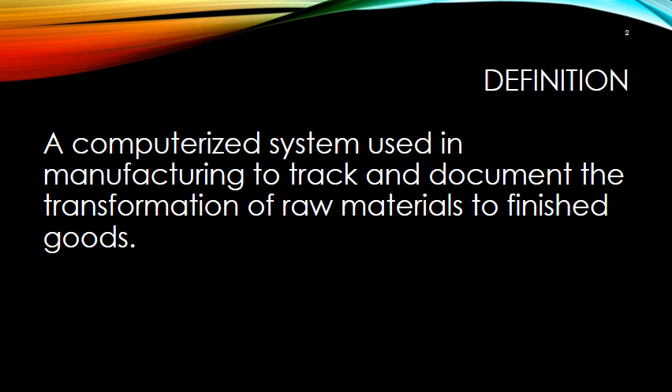I want to start with a simple definition. This one comes from Wikipedia, and it's sufficient for this introduction to the concept. A manufacturing execution system is a computerized system used to track and document the transformation of raw materials to finished goods. The genesis of these systems can be traced back to traditional factory or shop floor operations, in which we're really talking about taking in raw goods like steel and producing finished products, but they're used in a wide variety of modern businesses to solve the same kind of problem.

MES software is intended to fit into the niche between the ERP, or Enterprise Resource Planning System, and the command and control systems like SCADA that actually drive machines and factory processes on the floor. We'll get into more detail about those elements of the operation shortly, but I want to start by defining the problems that MES is trying to solve.

In general, the core goal of any manufacturing operation is to increase efficiency and reduce waste, both of time and materials. Historically, the goal tended to be throughput, producing more goods per unit time, whereas modern businesses are often focused more on cost containment and financial efficiency. In either case, any factory wants to avoid excess inventory that's not being converted into saleable goods. Inventory represents a capital expense, and the longer it sits on a shelf in a form that can't be monetized, the more of a company's resources it consumes.

Bottlenecks on the factory floor are deadly. Resolving bottlenecks in a manufacturing operation isn't really in scope for what we're talking about here, but it's an important part of visibility into a factory operation. Eli Goldratt wrote a book called The Goal, which introduces this concept he calls the theory of constraints, which digs into how bottlenecks emerge in a factory and how to find and fix them.

And finally, almost all businesses rely on forecasting to drive their operations, but forecasting is never perfect. One of the essential functions of an MES is to give executives and decision makers the ability to analyze manufacturing operations in real time to make good decisions about where and how to invest resources, increase or decrease lead times at the sales level, and so on. The data from an MES also helps to pinpoint problems or weaknesses within the manufacturing operation that should be fixed to improve the overall position of the business.

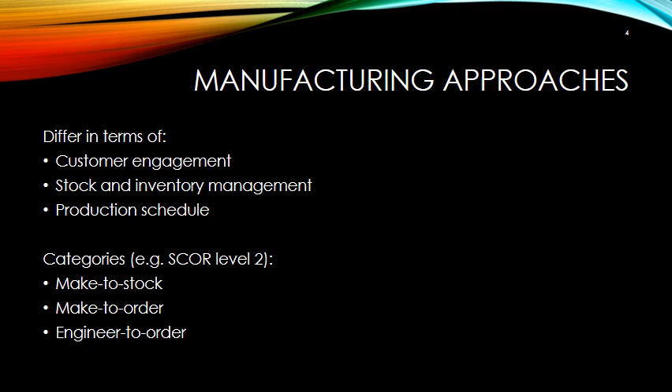So just a little bit of history. Back in the late 80s and early 90s, as computers really started to become integrated with the business, a new type of computer system called the ERP was engineered. The idea was that the ERP would be the one-stop shop for all business operations within a company.

In practice, ERPs are still and were then enormously complicated and difficult to manage, and they weren't good at providing real-time analytics of operations on the factory floor, which are analytics that executives need to have to make good decisions about the factory operation. ERPs were good at financial planning, they're good at interacting with customers, taking sales orders, and so on, and they're good at making payroll happen.

But something a little more focused on the manufacturing operation specifically was needed, and that's where the MES comes in. It's not there to make macro-level financial decisions, it's not there to interact directly with factory equipment, but it sits between those two systems in order to arbitrate and provide data on decisions that are necessary to make the manufacturing operation itself more efficient and sustainable.

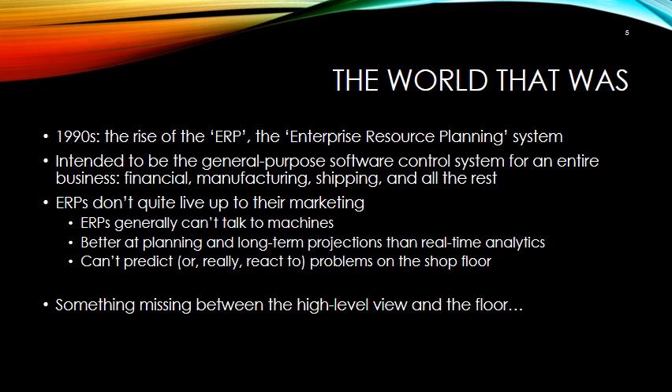This slide is just a bit of additional background. In addition to the ERP, which we can think of as the high-level financial and customer management system, most modern factories rely heavily on computer-based automation to actually manage the equipment on the floor, which includes everything from directly issuing commands to specific machines like a heat press or a lathe, to specifying the inputs required for the next job to be run, and so forth.

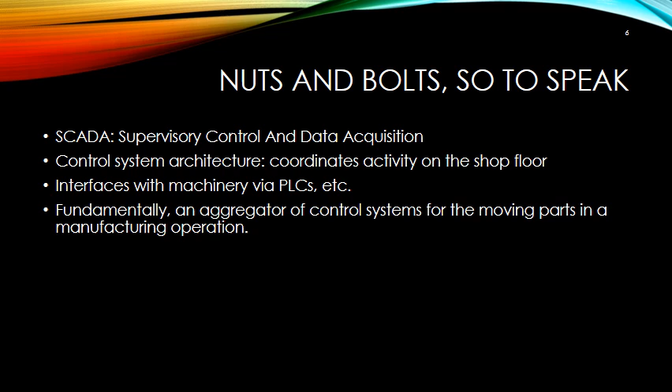The general term for this type of software system is SCADA, which stands for Supervisory Control and Data Acquisition. And I mention it here purely to add some context to the role of the MES. The MES doesn't explicitly control factory equipment, nor is it responsible for long-term financial planning or accepting sales orders. It's the system that sits between those two broad categories of computer software to arbitrate and provide real-time information back and forth.

The term MES was originally defined by the Manufacturing Enterprise Systems Association as a dynamic information system that drives effective execution of manufacturing operations. But in practice, this doesn't necessarily provide a clear picture of what these systems really do. All manufacturing execution systems are used to manage and monitor work in progress on the factory floor in some way, but the specific software functions often vary widely by industry.

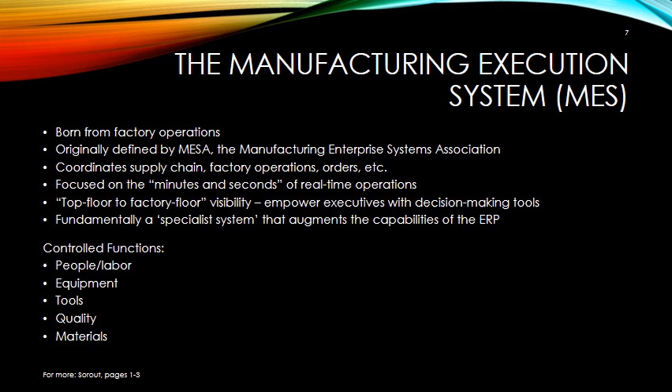In general, though, we can say that MES systems allow users to specify when materials should be ordered, to schedule tasks against an organization's production capacity, to provide visual or data-driven representations of production workloads in real time, and to offer some form of overall measure of equipment effectiveness to gauge efficiency. Some MES systems can also guide workers or machines through the production process directly.

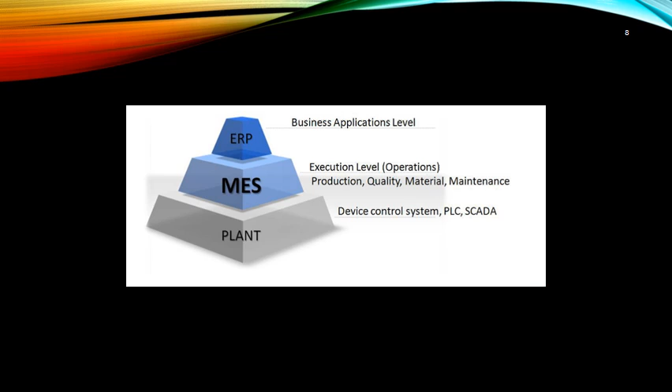This is just a simple graphic to help illustrate the position of MES within the overall software portfolio. The ERP sits at the top and is responsible for strategic forecasts, financial planning, and customer interactions. And the plant management systems like SCADA sit at the bottom and interact directly with machines and personnel. The MES is a specialized system that works in the middle to coordinate interactions between these two systems and provide visibility analytics to the executives and the operators of those machines.

It often manages the QA process and can also be used to oversee packaging, shipping, and delivery, although those latter functions are commonly handled by other systems. In essence, we can think of the MES as taking over from the point that a sales order is generated to the point that the order has been delivered to the customer. The ERP is responsible for the rest.

In addition to the things that we've already talked about around efficiency and problem resolution and data visibility, one particularly useful feature of an MES has to do with the reduced cost of regulatory compliance in industries where detailed information on the manufacturing process is required by law.

And a good example is the food service industry, where in the United States, FDA regulations specify strict handling requirements for food products throughout the factory process. And an MES, properly configured, can provide all of that information and export it easily, which simplifies the process of responding to regulatory requests and new requirements.